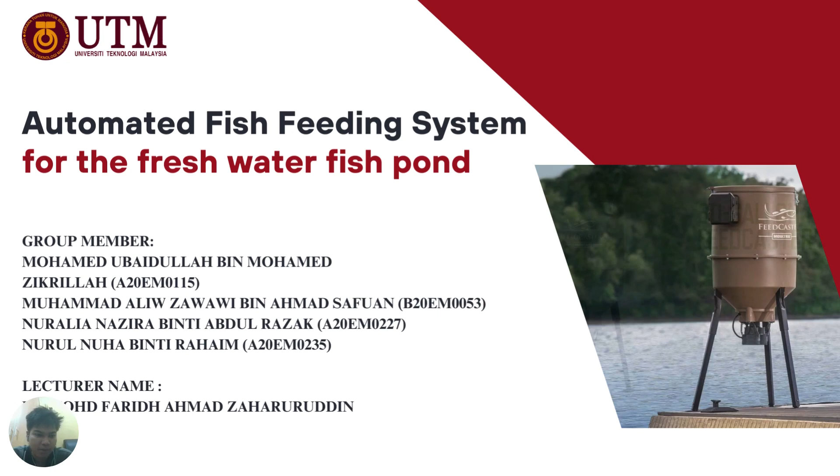An automatic fish feeder is a device that automatically feeds the fish at a predetermined time. It controls the fish feeding activity using a monitoring system and DC timer, instead of manually feeding the fish by hand. The device feeds the fish by dropping food from the storage through a hole.

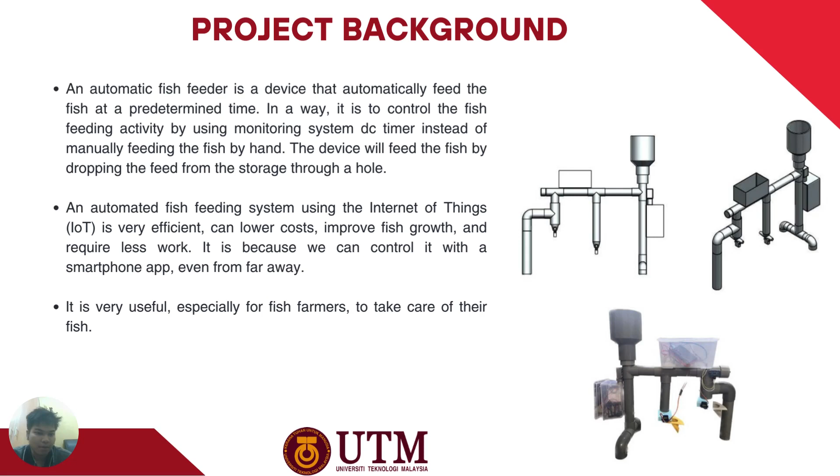An automated fish feeding system using the Internet of Things (IoT) is very efficient, can lower the cost, improve fish growth, and requires less work. This is because we can control it with a smartphone app, even from far away. This is very useful, especially for fish farmers to take care of their fish.

Let's move on to the problem statement. First, ineffectiveness of existing feeding methods. The manual feeding method is less effective. Humans are bound to make mistakes, and this can affect the performance of fish feeding.

Next, number two: inadequate amount of fish food fed. The manual feeding technique is incapable of feeding the right quantity of food.

And lastly, thirdly: absence of user interface features. Most of the available fish feeder devices or machines lack user interface features that allow the user to operate the device according to desired settings, such as timer setting, amount of food pellets, and others.

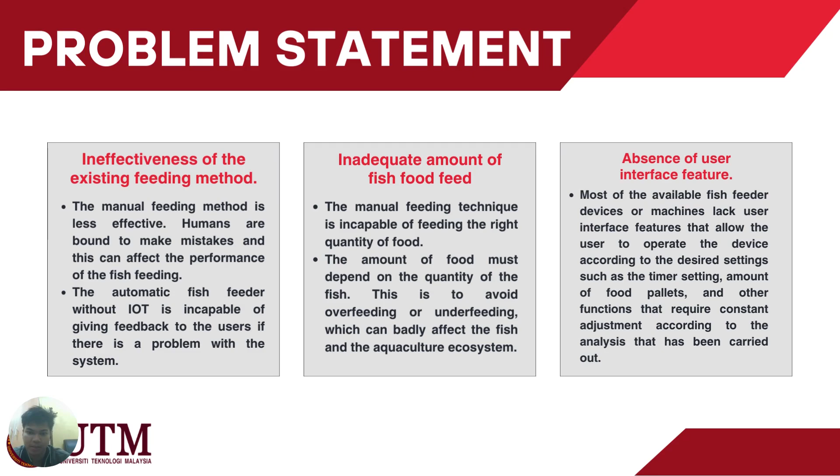So our project objective is to develop an automated fish feeding system with a combination of Internet of Things (IoT) that ensures accurate and timely feeding for freshwater fish, eliminating manual feeding issues and providing ease of use and control.

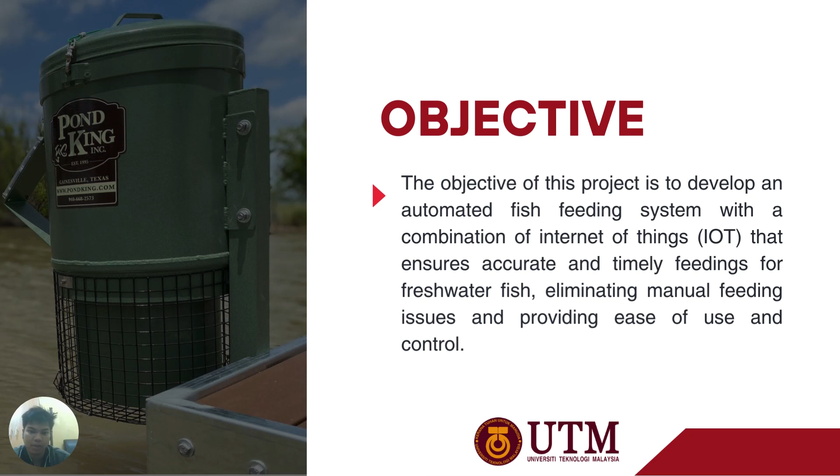So this is our project scope. First, conducting a survey and field study on existing automated fish feeding systems. Secondly, designing and fabricating an advanced automated fish feeding system with a combination of Internet of Things (IoT).

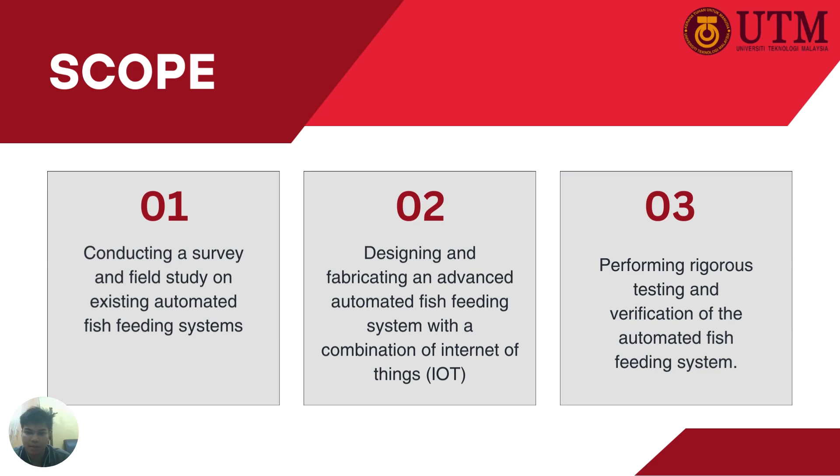And thirdly, performing rigorous testing and verification of the automated fish feeding system. This is our product design specification that we already discussed with our group.

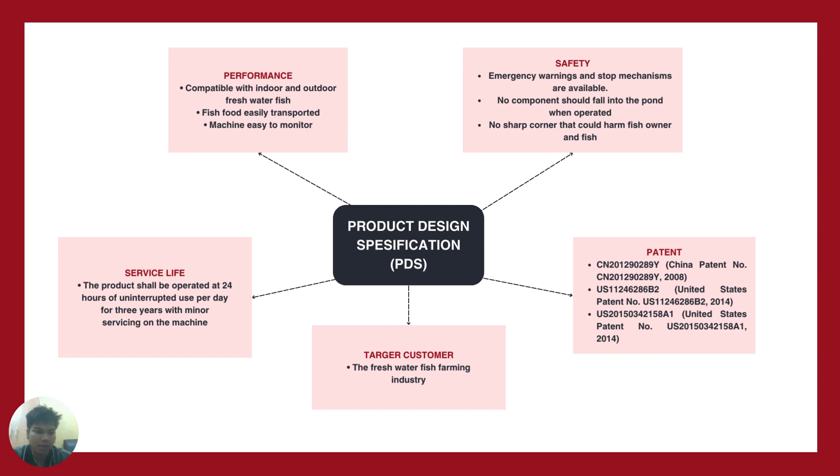Next, let's see the functional analysis: first, install and deploy; second, drive system; backups, backup drive system; next, food storage; next, food transport; next, gate open; then spreading mechanism; and lastly, warning system.

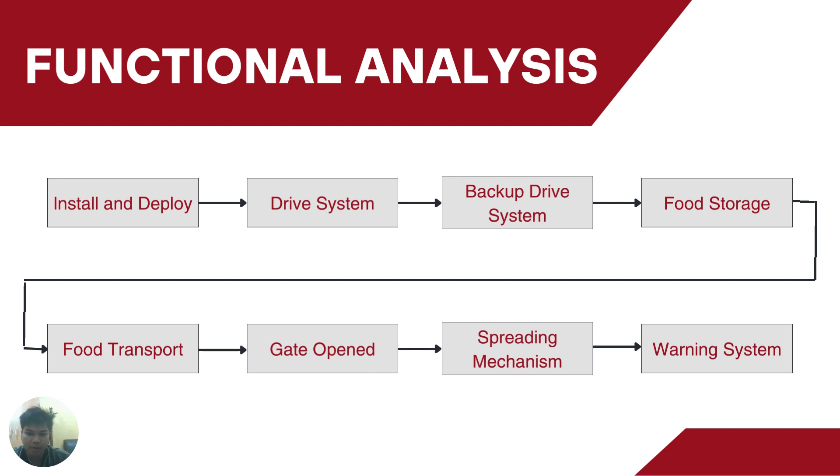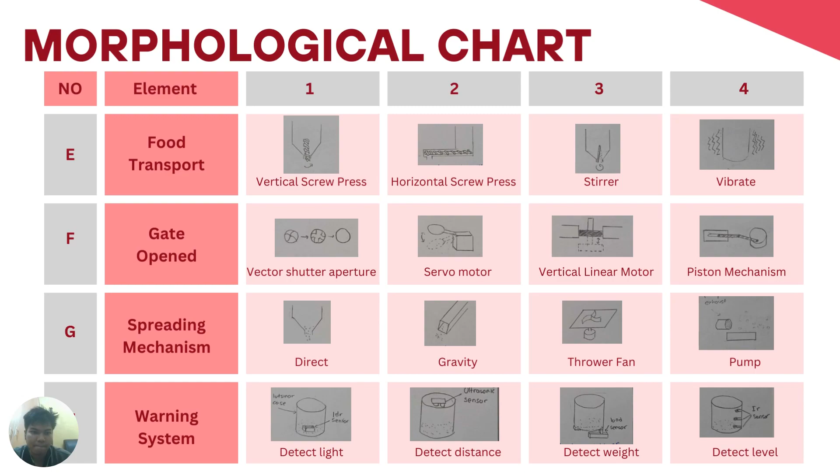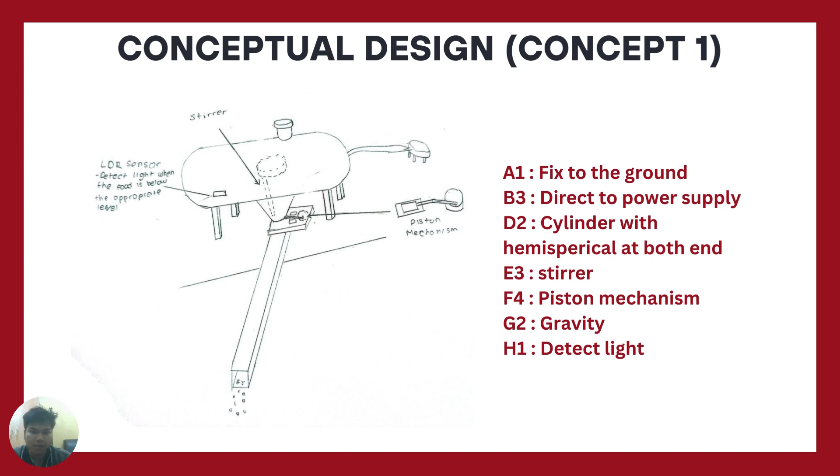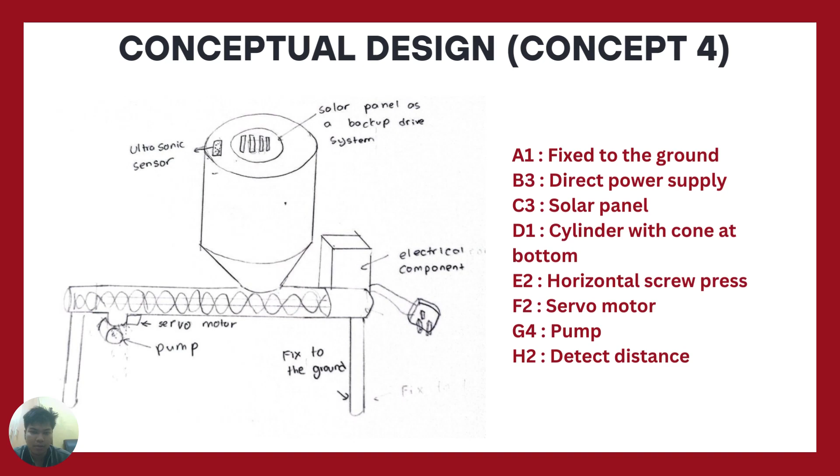After discussing with our group, this is the idea that we came up with for each of our group members. This is concept number 1, this is concept number 2, then this is concept number 3, this is our concept number 4, and lastly this is our conceptual design for concept number 5.

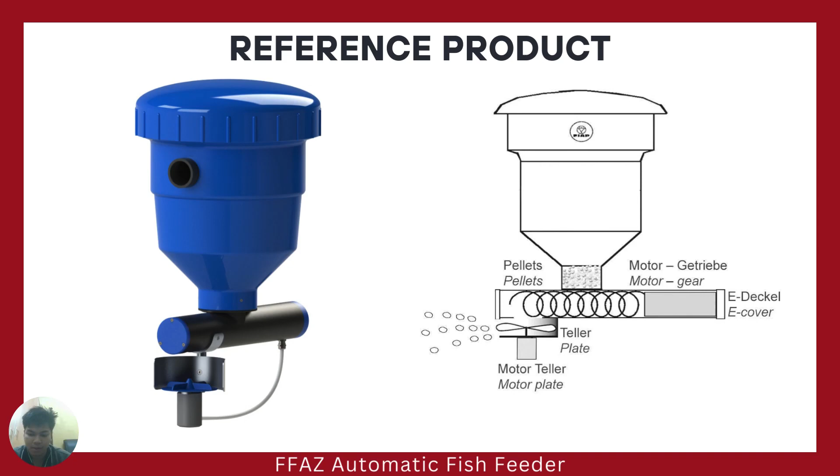And we took a reference product from research through the internet that we already selected. And this is our criteria selection.

First, easy to install: the time taken to install the device, and is there any additional equipment needed during installation? Number 2, the amount of food accuracy: the device is capable of feeding the fish according to the time delay.

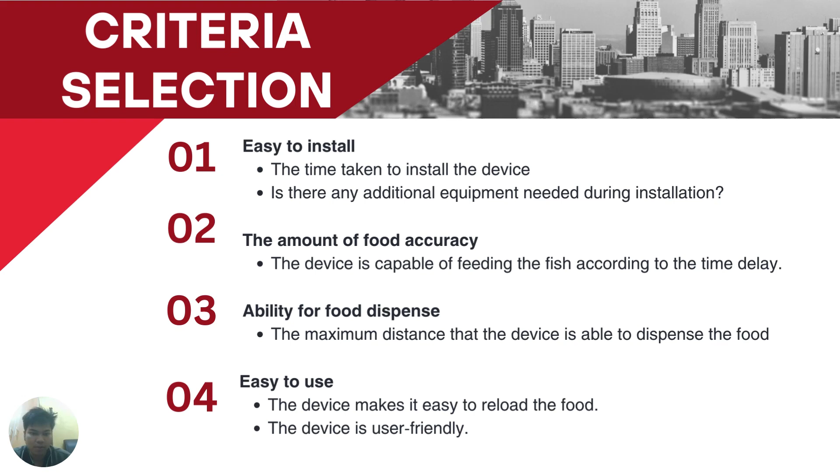Number 3, ability for food dispensing: the maximum distance that the device is able to dispense the food. Number 4, easy to use: the device makes it easy to reload food and is user friendly.

Number 5, manufacturing cost: how much is the manufacturing cost needed, and is the component used standard?

Number 6, safety: no component should fall into the pond, and no sharp corners that could harm the fish owner or the fish.

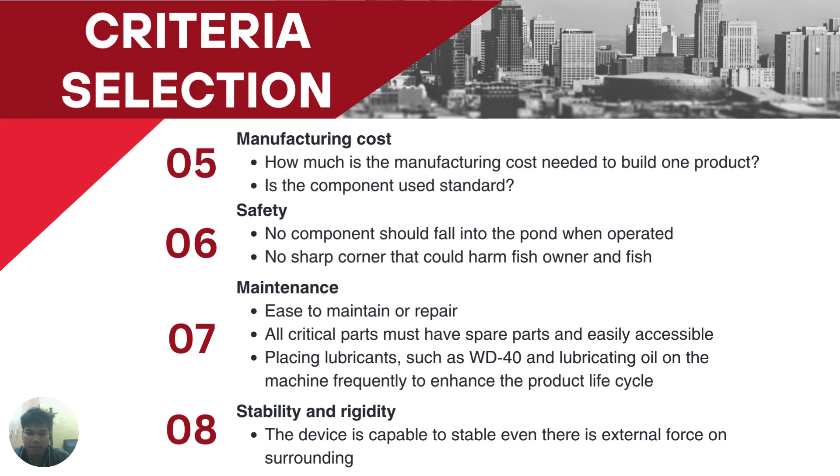Number 7, maintenance: easy to maintain and repair, all critical parts must have spare parts and placing lubricant. And lastly, stability and rigidity: the device is capable of staying stable even when there is external force from the surroundings.

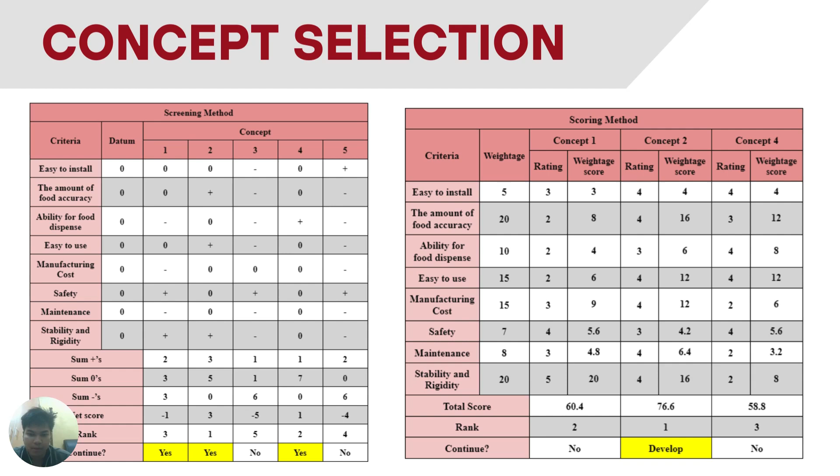This is our screening method that we already calculated, and then we calculated the scoring method. So we found out that concept number 2 is suitable to be developed.

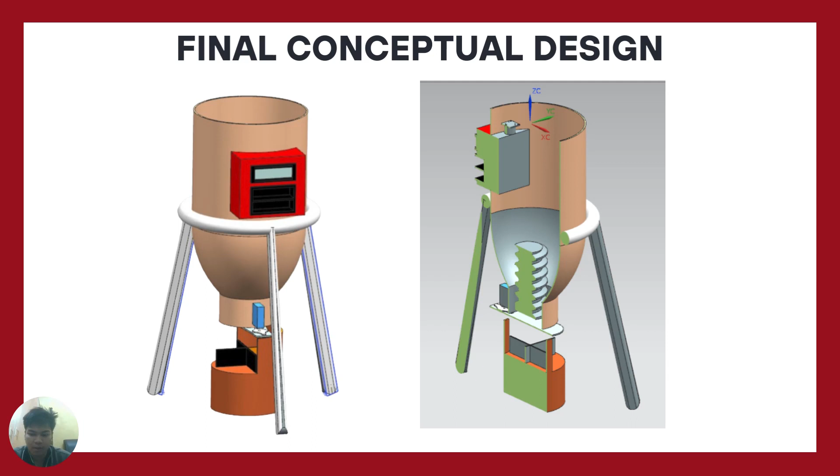This is the idea that we already did in the 3D drawing. This is the engineering drawing.

So these are the components we use: Arduino IDE, Blynk IoT, Blynk Cloud software. We use ESP32 as a microcontroller, a DC motor, and a motor servo. We also use a breadboard, jumper wires, ultrasonic sensor, motor driver L298N, switch button, lithium-ion battery, and finally an LCD display I2C.

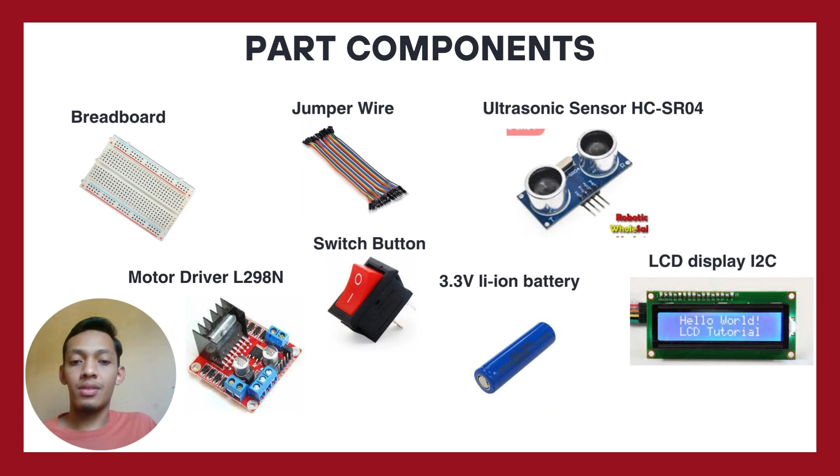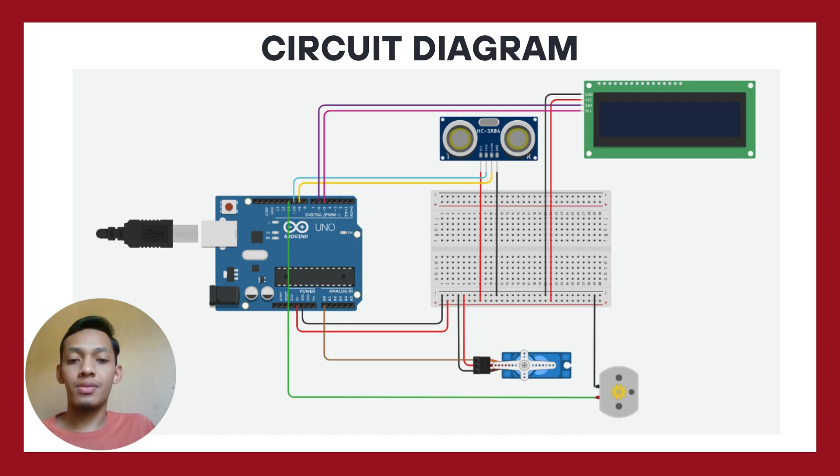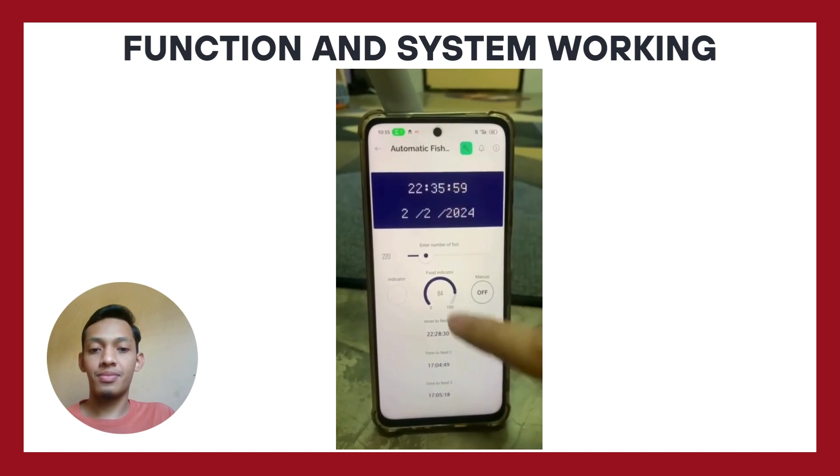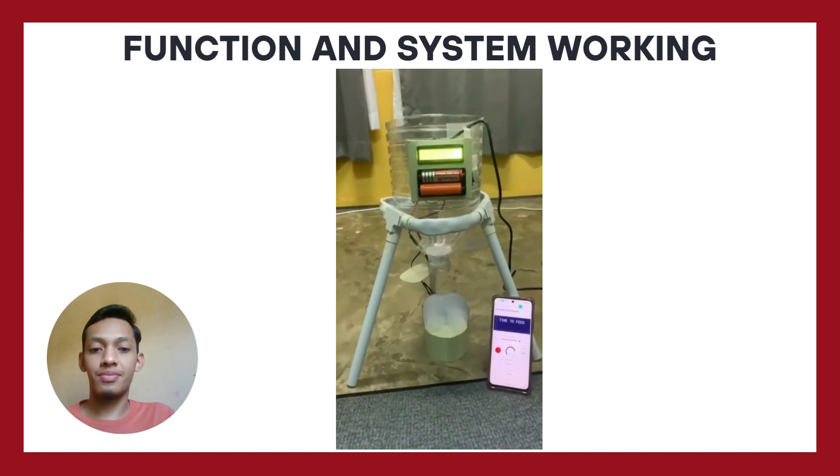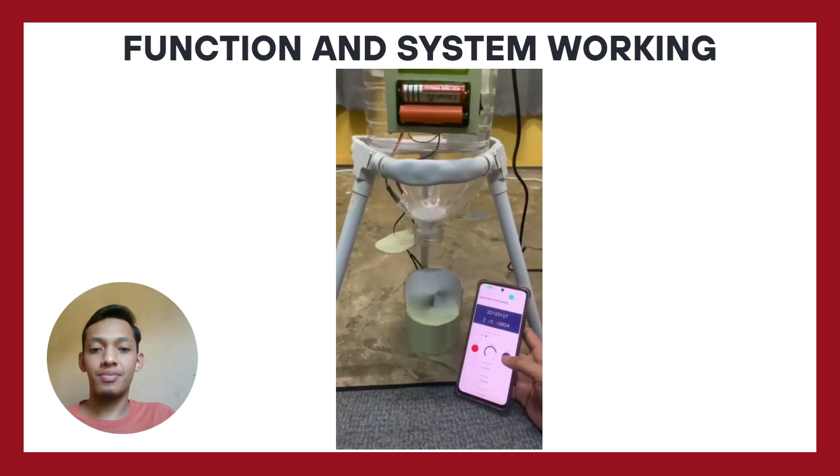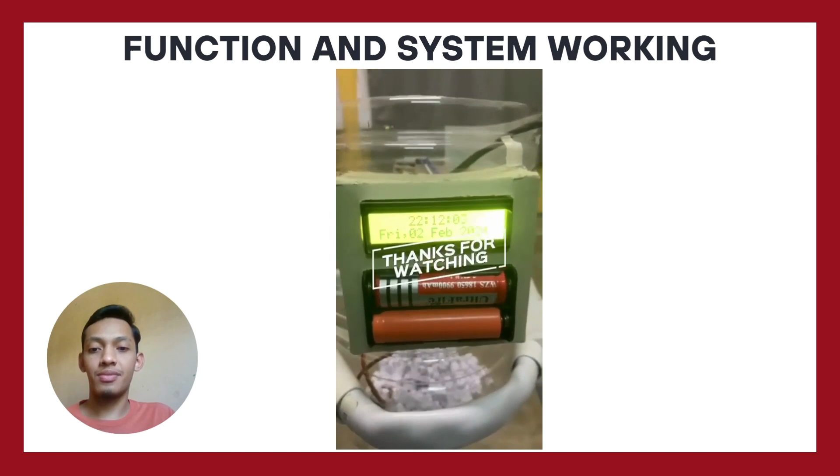Now we look at the function and the system working. Features include: setting the amount of food based on the number of fish, a timer system, a manual feeding option, and a sensor that can detect how much food is left and notify the user. This is the final prototype for our automatic fish feeder system. Thanks for watching.